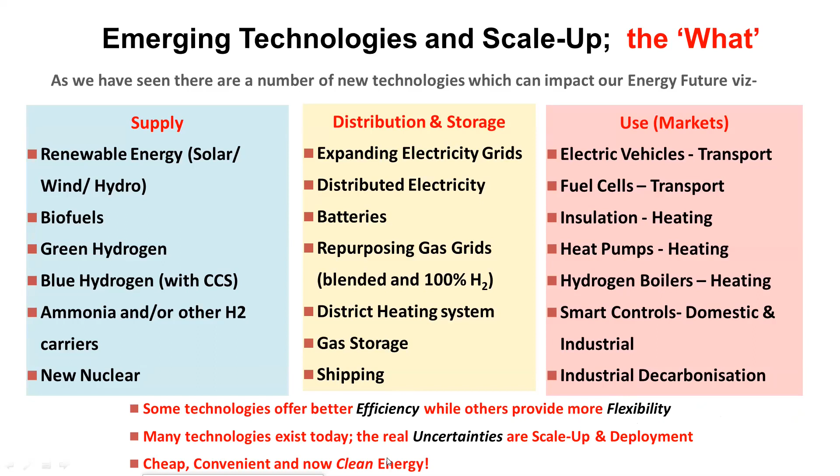Turning to the first key driver, we've already noted that today's energy utilization is far from efficient, and many reports have commented on how new technologies can improve this through electrification, harnessing renewable energy. The UK Committee for Climate Change has provided some excellent summaries on two specific opportunities: electric vehicles and heat pumps. These charts demonstrate their efficiency benefits.

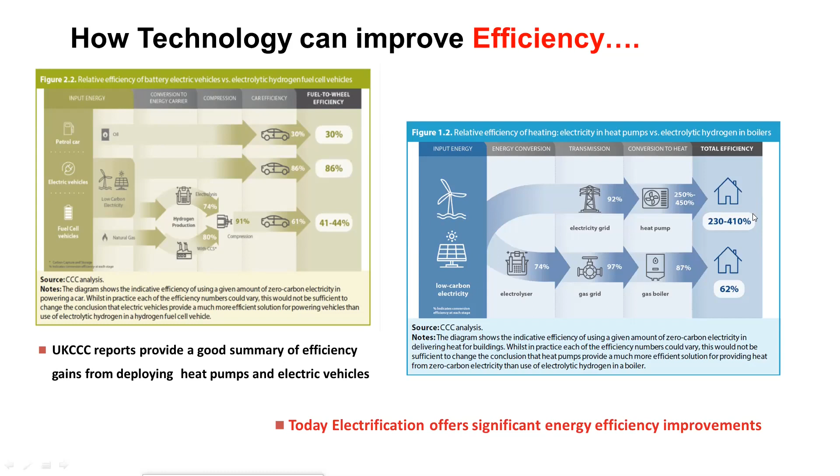Using renewable energy, electric vehicles triple efficiency over petrol cars, while heat pumps significantly reduce energy requirements for our buildings. Today, electrification offers significant energy efficiency improvements, but the cost of deployment is still high and requires wider customer acceptance.

Let us take these new technologies into our first future energy scenario, which uses the block model we used in the first video, and it considers full electrification.

Many stakeholders favour this scenario, which utilises renewable energy, such as solar and wind with batteries. It maximises the use of electricity for transportation with electric vehicles, and within our homes it considers heat pumps deployed with smart controls technology. This scenario sees optimal energy use, halving our total demand, going from the 6 units I showed in video number 1 to 3 units here.

The recent BBC Energy and Net Zero America reports estimate that this scenario will require a tripling of our electricity grid, though this could possibly be tailored if we successfully decentralize some of our supplies. To meet this demand, we would have to scale up our current renewable energy supplies by a factor of, say, 8. This will require very significant expansion on current plans with associated concerns on land and coastal water usage.

For this scenario to work, the seasonality of power supplies and demand will have to be supported by enhanced smart control systems, battery and power banks, and with significantly higher levels of building insulation.

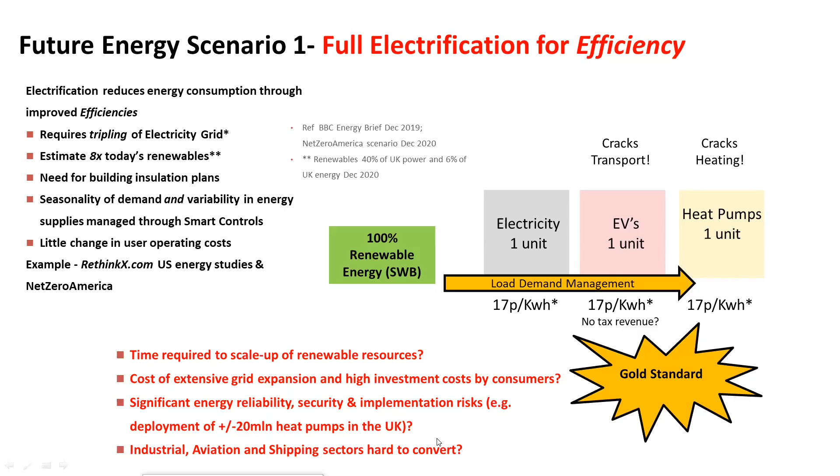To address some of these concerns, let us turn to our second key driver, flexibility. Today, we import energy from overseas, and as we move forward, it is still doubtful that we will be able to generate sufficient electricity to meet all our daily demands throughout the year locally. Technologies such as green hydrogen and biofuels are being developed to try and address these flexibility needs.

Associated technologies include the conversion of hydrogen to ammonia, which potentially can be transported more easily. Green hydrogen, ammonia, and biofuels provide an opportunity to commoditize and move our energy into the future.

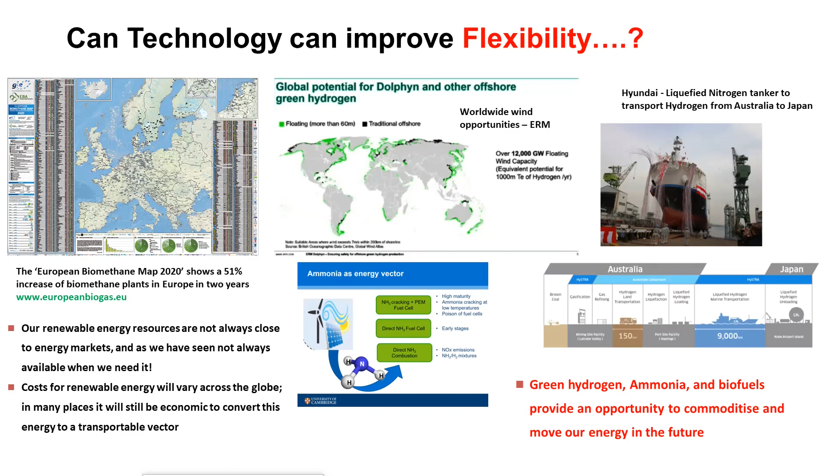We can bring these energy vectors into our second scenario, a hybrid solution, incorporating the benefits of these more flexible fuels onto our electrification scenario. This would still be underpinned by the efficiency of electrification.

Both domestic and transport sectors can benefit from hydrogen through fuel cell vehicles, and hydrogen boilers to meet our heavy-duty and seasonal demands. These measures will reduce the extent of electricity grid expansion, especially as our current gas grids can be repurposed.

Overall, this scenario will require more renewables to facilitate the production of green hydrogen from electrolysis. However, potentially this can be realized at locations with lower cost and with more reliable renewable energy resources. For instance, this could be from North Africa or Australia with pipelines and/or shipping connecting resources to energy markets.

This scenario with hydrogen and biofuels also provides a more feasible solution for the shipping and aviation sectors. And indeed, the German energy strategy considers green hydrogen being used for the manufacture of feedstocks for the chemical industry.

This hybrid scenario requires a small premium on costs and efficiency to provide flexibility for a more sustainable energy future. Furthermore, it allows a realistic expansion of our power grids.

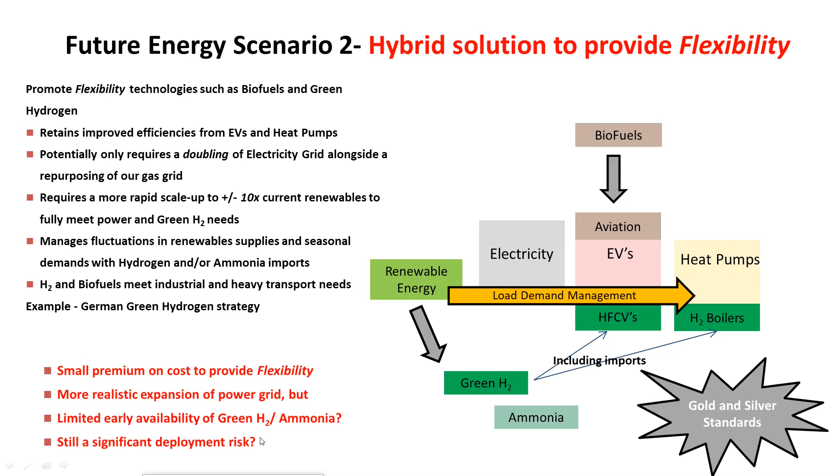To help us understand these deployment risks, we can expand our earlier system model by adding scale-up and deployment challenges such as design and installation. The critical success factors for technology deployment are innovation, finance and environmental impact, human resources, project management, and safety.

Looking at this model in the round, I will conclude that the degree of change required during the energy transition is very significant, particularly within the time available to 2050. So while target setting is easy, delivery of a plan is far more uncertain and challenging, and hence the subtitle for these presentations, Efficiency, Flexibility and Uncertainty.

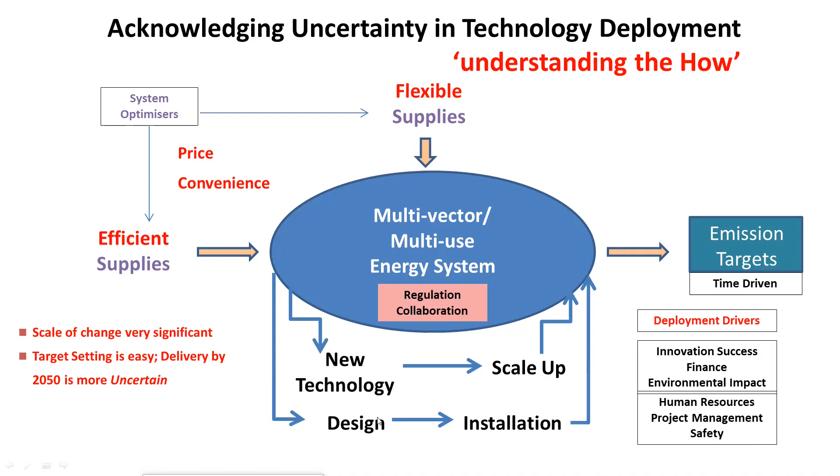To manage these uncertainties, I believe we need to broaden the range of technologies which can be deployed, and especially look at those which can capitalize on the current infrastructure, available skills, and consumer familiarity. Here we can consider the conversion of our gas grids to hydrogen service, the deployment of hydrogen-ready gas boilers, and industry's experience with hydrogen production and carbon dioxide removal.

Blue hydrogen and carbon capture, utilization and storage provide a parallel but mutually beneficial track to electrification to achieve net zero.

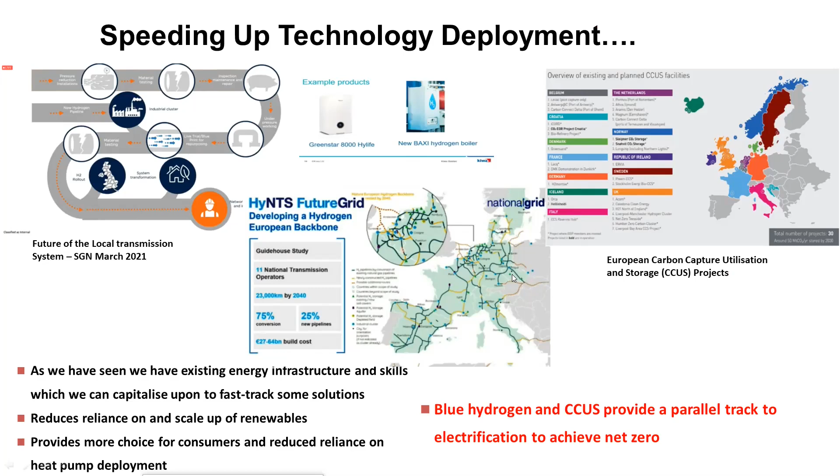We can bring these into a third scenario, the interim hybrid scenario, one which can reduce the risks of achieving net zero by 2050. Clearly, we still need to pursue electrification technologies with, say, a doubling of the power grid, but this time over a more realistic time period and with a better phasing of renewable scale-up.

Our gas grids are still repurposed to hydrogen service, though with greater surety of early hydrogen supplies, which over the next 20 to 30 years can be produced more cheaply than that from electrolysis. Blue hydrogen schemes are already being considered in the UK, the Netherlands and Australia.

This scenario reduces the uncertainties on the full deployment of renewable energy, green hydrogen and biofuel technologies. It is estimated that blue hydrogen will double the cost of its source natural gas, though this is still less than the 3-to-1 premium we pay for today's power.

This scenario provides an effective segue to the sustainable full hybrid scenario. It is delivered through 1 gold, 2 silver and 2 bronze standard sets of technologies.

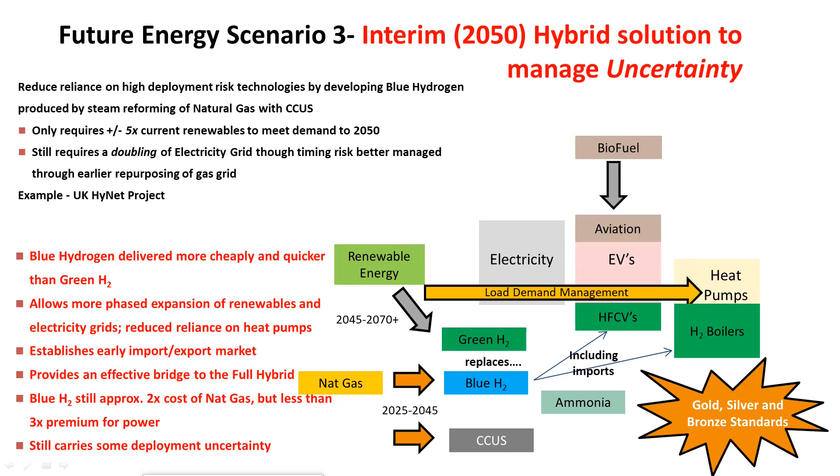Having looked at this picture within the UK or the developed world, let us look back again at the wider picture for the developing economies, where we identified a different set of priorities. We discussed this in part 1. We can also place their different strategies onto our energy system model as shown here.

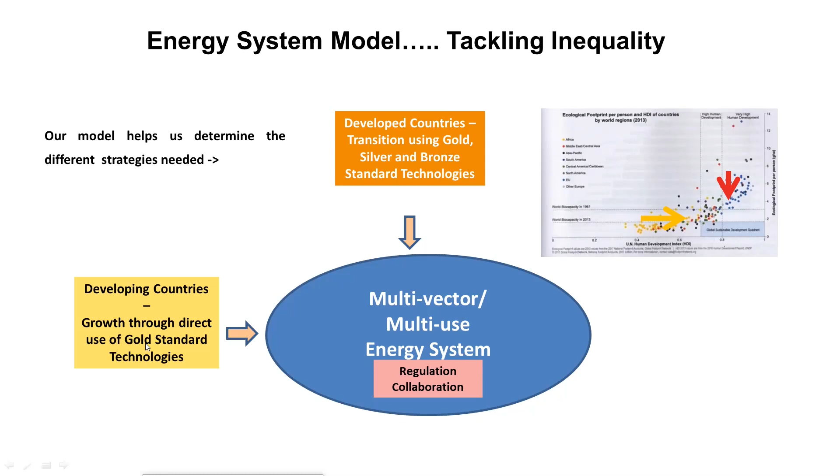Simply put, we need to manage the challenges and impact of energy flexibility for the developed nations, while simultaneously increasing energy supplies to developing countries through deployment of gold standard efficiency technologies.

This is consistent with many of the energy initiatives in developing countries, which are looking at electrification, and I provide a couple of examples here, including the development of this large solar power project at the Zaatari refugee camp in Jordan, and the SAIC low-cost electric car in China.

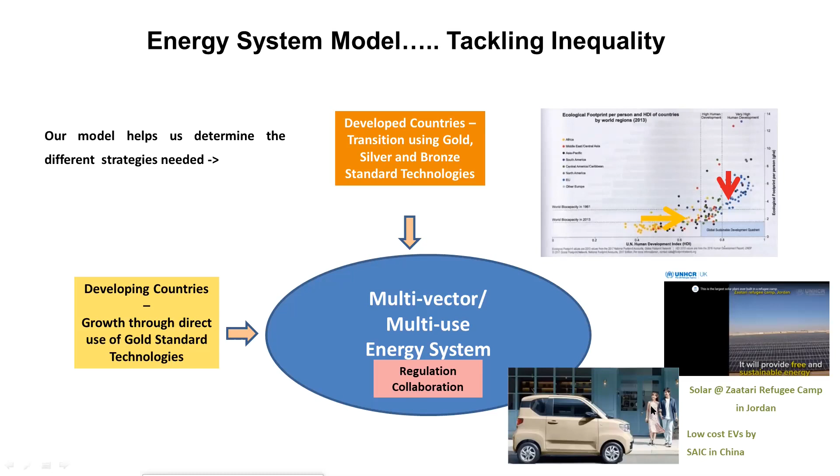Now let me move our scenarios into the reinforcing multi-vector ring schematic I used in the first video as well. We have seen today that we are in the gas-centric world still supported by oil and coal. Moving forward, we need to rapidly move to a renewable-centric world.

As I have explained, I believe we could deliver an interim hybrid solution using all three sets of technologies by 2050 to achieve net zero.

However, our longer-term goal will be to phase out blue hydrogen and carbon capture as these get replaced by biofuels, green hydrogen, and ammonia to meet all our flexibility needs under a full hybrid scenario. This must be the goal for 2100, though hopefully a lot earlier.

So 2050 is only part of our journey. However, it can still be carbon neutral. With the growth in consumer demand forecast by the IEA to double by 2050 and to grow further by 2100, we will also see the need for extensive efficiency measures.

Let me now translate this plan and color code it against our gold, silver, and bronze standard technologies, as hopefully this will clarify our transition trajectory.

Gold standard technologies dominate to ensure efficiency. These are supported by silver standard technologies to provide flexibility, while bronze standard technologies are used to manage uncertainties during the challenging transition period. You will have seen that some oil and gas will still be utilized in 2050.

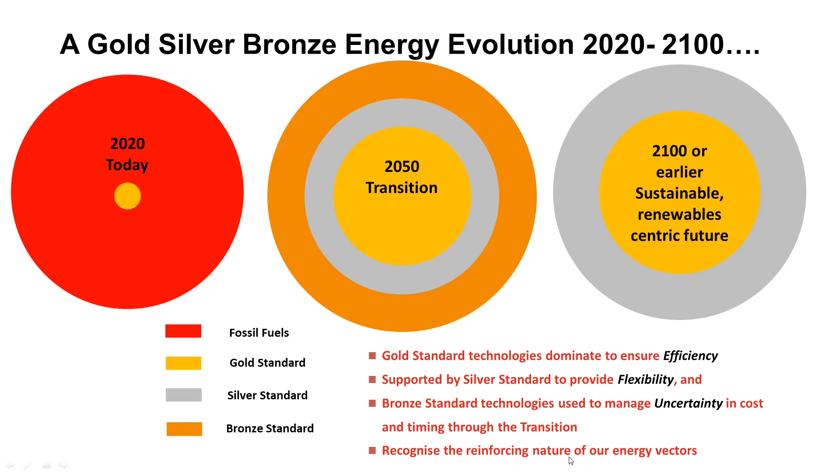Like others, I assume that this will be offset through other measures such as reforestation, which I hope can be considered here as a further bronze transitional technology. Hopefully this chart again shows the reinforcing nature of our different energy vectors.

So let me now summarize my conclusions for our policymakers. Firstly, something obvious: today we rely on cheap and convenient energy, so our move to clean energy will be challenging and requires firm policies.

Renewable energy, electric vehicles and heat pumps will ensure efficiency and ultimately reduce costs. Consequently, we must rapidly maximize deployment of our gold standard technologies.

However, we will still require flexibility to meet the demands of a global energy market. We need more than batteries, and we will still need to transport and store energy. To deliver this flexibility, we must deploy our silver standard technologies.

With the tight timeline to 2050 and significant delivery exposure, I contend that we must also deploy our bronze standard technologies. I would also surmise that there is limited regret from implementing these, as their deployment can be reduced at any time as they bridge to our longer-term solution.

As you have seen, these conclusions build up to form our target board for a gold, silver and bronze transition plan. We can only deliver this program through fostering strong cross-sector and international collaboration and developing an effective communication plan for the benefit of all stakeholders.